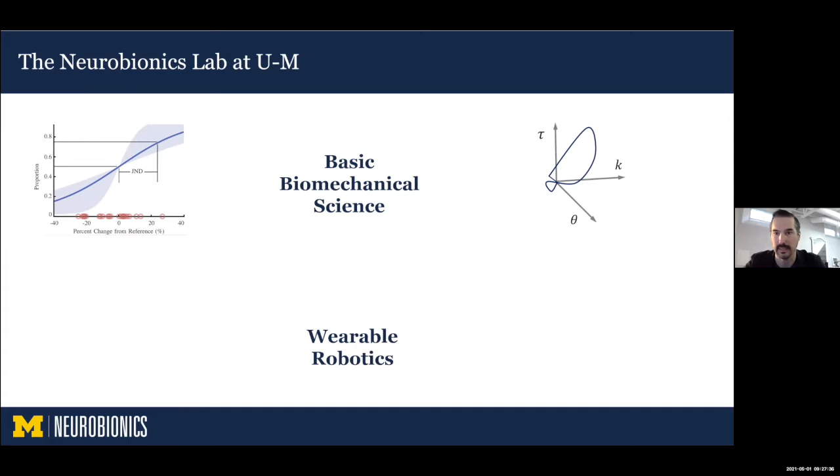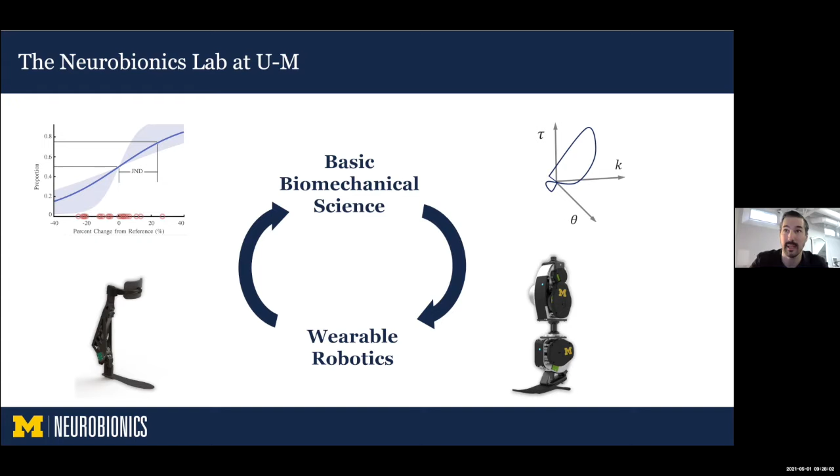So we build robotic prosthetic legs, that's what we're talking about today. We also build exoskeletons, and some of my work also at Google X is involved in the wearable robotics side. What's unique is we do these things together and they feed back on each other. The science that we're doing drives wearable robots that we build, like exoskeletons and robotic prostheses, and we also use novel robotic systems to answer fundamental science questions. That's something I won't really talk about in this talk today.

Okay, so let's think about open source bionic legs. Why might we need this? I would just say that control is one of the greatest challenges for robotic prostheses. It's one of the main reasons why you don't see robotic prosthetic legs in the public ever. If they make a mistake, someone can fall down a set of stairs. So that's a whole different set of risk than something like upper limb robotic prostheses, which if you make a mistake, it's not so dire.

So the goal for this project is we wanted to build a system that's open source that would prevent people from having to start over every time, which is bad because it hinders comparison. It's difficult to know whether the results from control strategies stem from the different hardware that people use, or whether it stems from the control strategies, and it's incredibly inefficient. We're spending this money and time over and over again, and we really should be using that money to address the challenges in mobility that these people have, not reinvent the wheel.

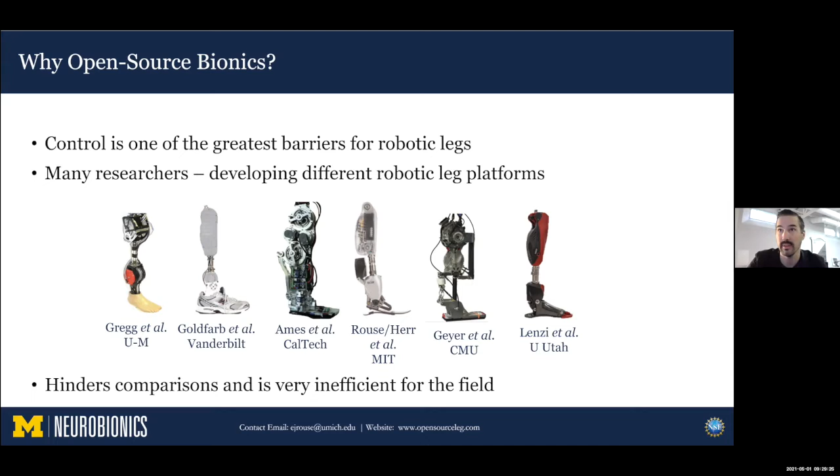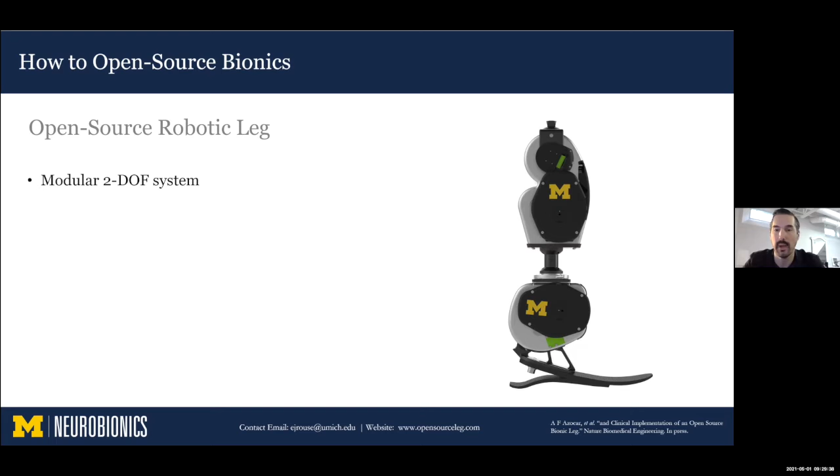The leg that we built is something called the open source robotic leg. It's 2 degrees of freedom, so it's a knee and ankle that can be used together or separately. Something that's kind of neat is we leverage technology that was developed from the drone industry. So now we're looking inside.

So in order to build a robotic prosthetic leg, we have to choose a motor, so that's going to act like the muscles. We have to choose a transmission, and that changes the amount of effort that it provides, how fast it can go, to be put in an environment that's similar to the way humans move. So we use motors that were developed by the drone industry, that lowered the transmission ratio, and we used low cost, easy to obtain transmissions, which were belt drives.

Let's see if I can move this forward just a bit.

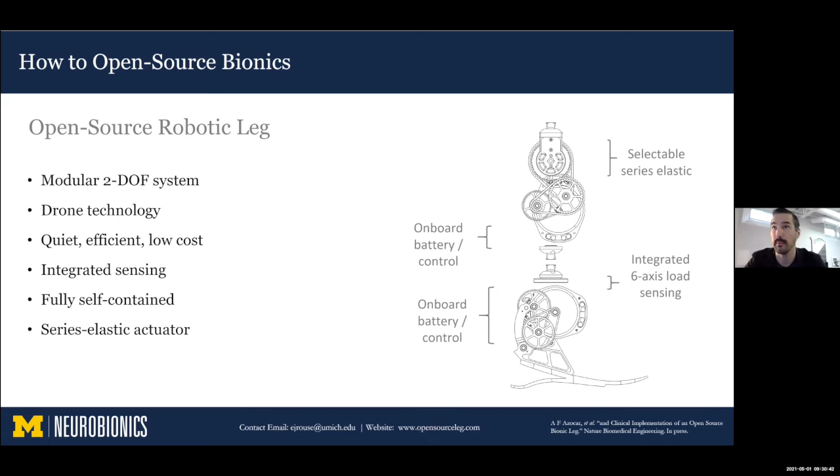Another thing we did intentionally was provide lots of sensing options. People developing control strategies need to sense what's going on with the robotic leg to understand what's happening and tell it what to do. So we added many sensing options: a 6-axis load cell that tells how the foot interacts with the ground, plus sensing for joint angles and how much effort the motors provide, similar to how your muscles provide force. All this information can be used to tell the system what to do.

We also invented a new type of spring, which I want to talk about for a second. Springs are kind of important in wearable robotic technologies. One reason is they store energy, just like the tendons in your body, so we can return that energy without using the battery to provide it. There are other positive properties too.

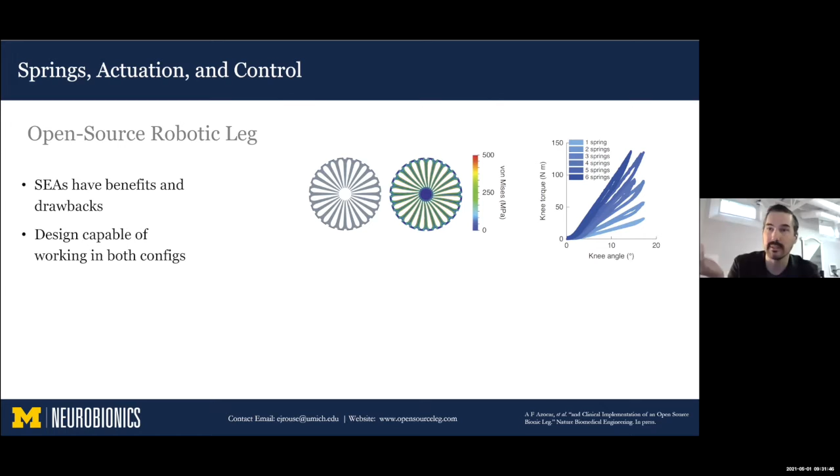One is improved shock tolerance. If you bang your leg on the ground, it doesn't cause a ripple of force that can be catastrophic. We designed a system usable by people who like springs and people who don't, since people who don't like springs typically avoid them because they add complexity and mass. The type of spring we developed is this new torsional spring, made of 24 discs. What's neat is we included these springs at no added mass or complexity.

Here we're looking at a cross section of the knee, cut in half so we can see inside. We have these springs stacked up inside the transmission, which costs no volume and very little mass. This was a neat addition that helped researchers build better control systems and make the legs respond more like the natural human body.

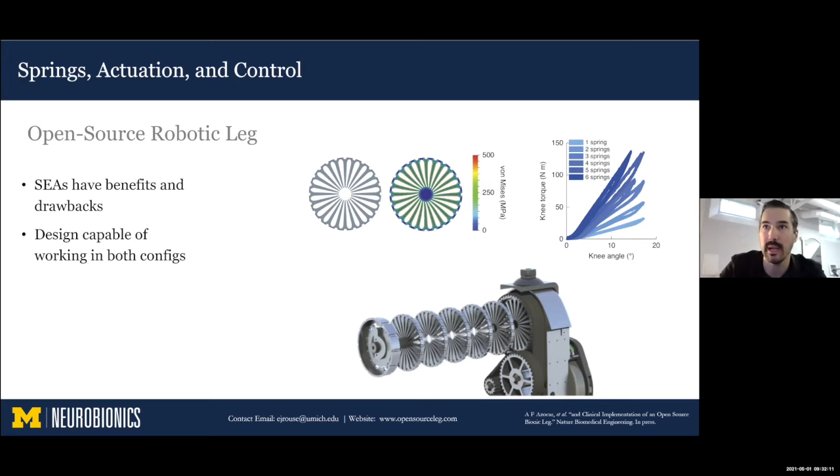When selecting and building a wearable robotic technology, one thing we have to do is select what motor to use. Like I mentioned before, we use motors developed by the drone industry.

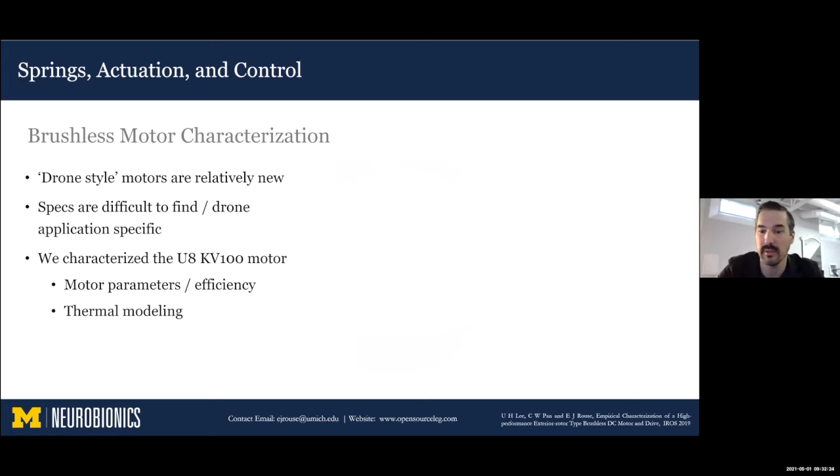When selecting a motor, what we care most about is how much heat it produces. Heat is really the governing element that restricts performance. When the system gets too hot, we have to stop using it or modify control. So to design a system that uses the motor without it getting too hot, we need to know some properties about it. Most of the time motor manufacturers give us that information, but drone motors don't. They're built for drones, which have lots of air blowing over them, so they're in a different thermal regime than what we use. We have to calculate these parameters ourselves.

The way we did that was sending electrical current through the motor and watching it heat up. As we do this, the motor gets hotter and hotter, and we're measuring how heat moves through the motor into the atmosphere. That tells us how much energy we can provide to the robotic leg when trying to make it walk or act like a human. It's kind of neat.

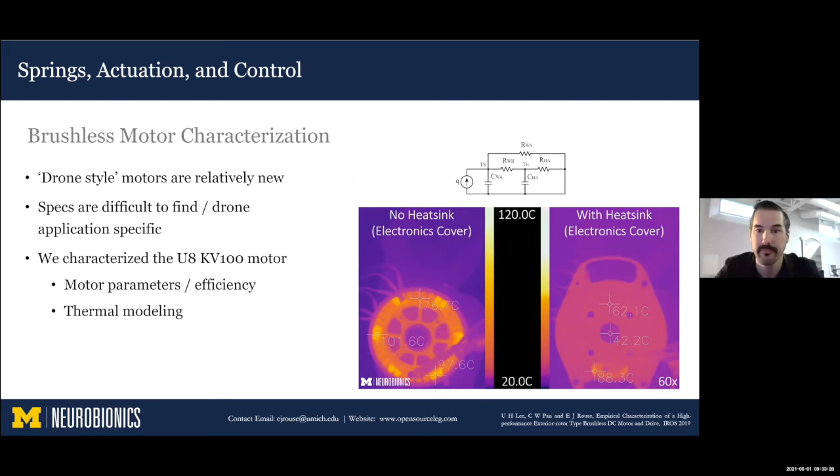In addition to building the technology and specing a motor, we have to determine how well it can control or perform, which we do through a set of tests. I'll call this closed loop control performance - you maybe don't need to know the term, but we can control different things: how much effort or torque it provides, its position in space or joint angles, and the kind of mechanics the system acts like.

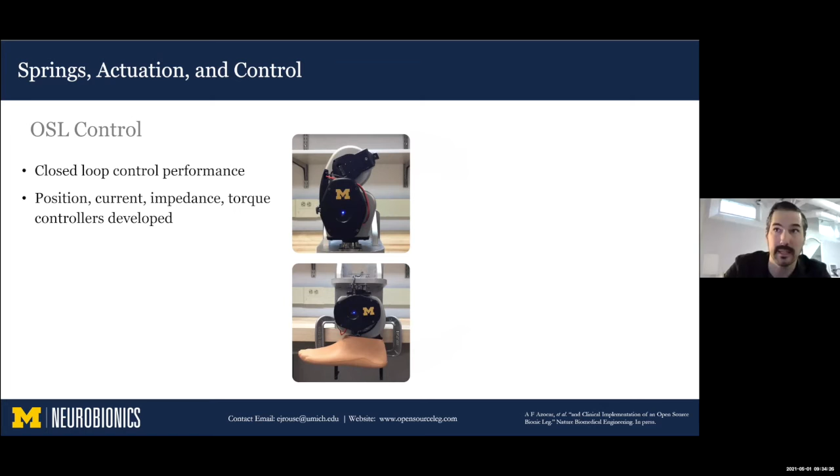I'll show a video of some things you might find neat. Here we're quantifying the performance of the controller - how well it does what we tell it to do - by testing how fast it can go to a desired position. We tell it to go to different steps and track how fast it gets there. This is a standard way to quantify control strategy and performance.

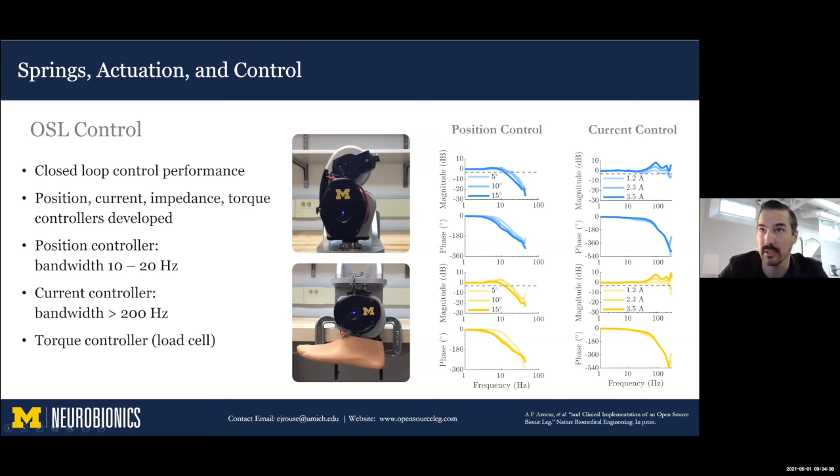These plots are probably not that helpful, but they show the same information in something called the frequency domain, which we'll see.

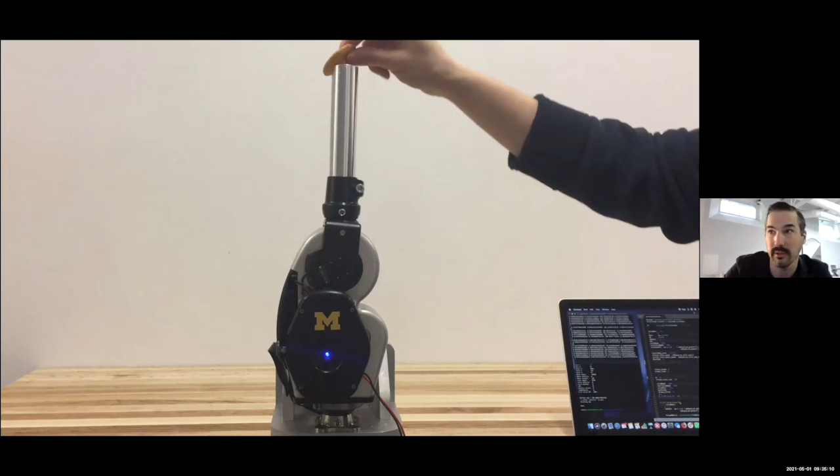A more intuitive test is to have the control system provide no effort, rejecting its internal friction and loss. If we can move it around with a cracker and the cracker doesn't break, the control is doing a good job. So we're looking at the knee here - that's the top of the person's thigh moving around - and we're able to move the system without breaking the cracker, indicating the control is good. That's a bona fide robotics test right there.

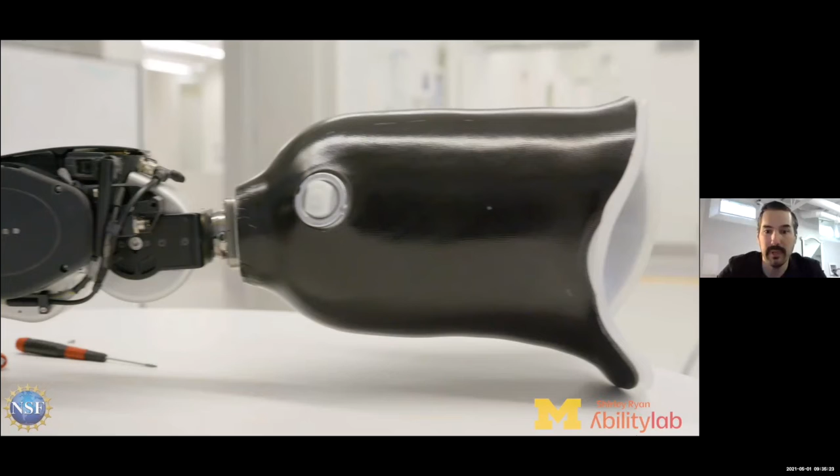What I want to show now is a video - hopefully this comes through. Let me optimize for video real fast. Okay, let me play this video. This shows our open source work.

The reason I wanted to show that video is because it shows the intent of the project. We built this leg to get it out there in the research community, testing control strategies and eventually making a difference in people's lives. That's showcasing the state of the art of this robotic leg hardware and control. He was able to walk around this hospital and do different activities.

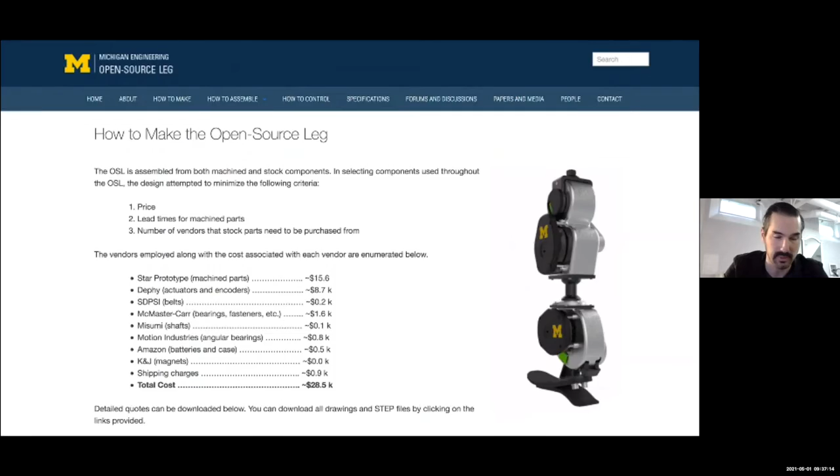I want to take a minute and tell you about some resources that exist. One is our website, where you can learn all about this project. It actually provides all the information needed to develop one of these systems, like purchase parts, assembly instructions, the bill of materials, solid model drawings for manufacturing, and detailed control instructions. To check it out, it's opensourceleg.com.

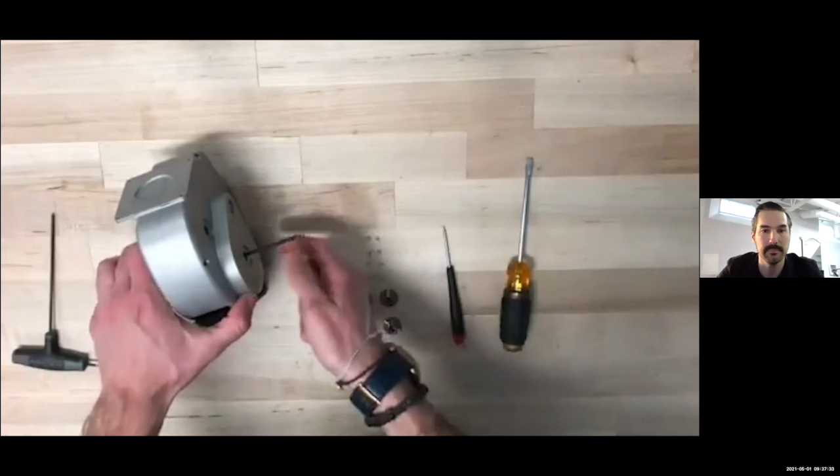We started this project three years ago to get it into the research community to advance development. I'm excited to say we have about 10 institutions using the leg right now, which is really wonderful. In terms of other media and popular culture, there are articles on this leg produced by companies like Digital Trends, Fast Company, or Freethink, and trade magazines, which are important to get information about this project out to engineers and researchers who can advance control strategies and help people with disabilities.

We also presented at the Amazon conference where we demoed this robotic leg with Terry, the individual you saw in that video. So we talked about the design, which is what I talked about today, but also the control, the artificial intelligence control strategy that tells it what to do. That video is on YouTube—if you're interested, let me know, I can post a link. It has a neat description and a very cool on-stage demonstration, which is almost unheard of in our field due to the risk.